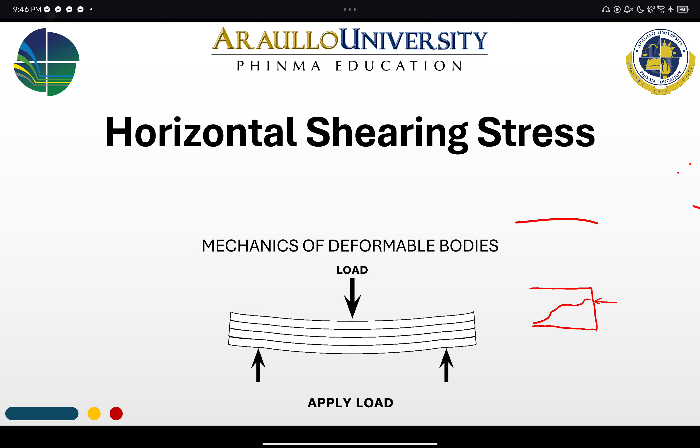So the horizontal shearing stress in the beam, tau, is given by the equation VQ over IB, where V is the shear force acting on the element, Q is the static moment of area, I is the moment of inertia of the beam, and B is the width being considered.

So basically, kung yung cross section natin ay, let's say, square, at gusto nating i-analyze kung mabibiyak dito yung ating beam, mahihiwa at a certain distance from a neutral axis, yung tinatawag nating B is yung lapad ng magiging crack, kung saan magkakaroon ng separation yung ating upper portion and lower portion ng beam.

Yung ating Q naman, static moment of area, that is the area nung matatanggal. Area nito, let's call it area prime. Moment, taking moment of this to the neutral axis, so meron distance na to na y bar. So yan si static moment of area.

Itong area na to, pwedeng area above, pwede rin naman yung area dito sa ilalim, kung ano yung mas madali. Pero dapat pareho lang yung makukuha nating sagot. Kung magkaiba yung nakuha mong sagot, ibig sabihin may mali ka sa pag-analyze. Dapat pareho sila, kahit above or below nung ating crack.

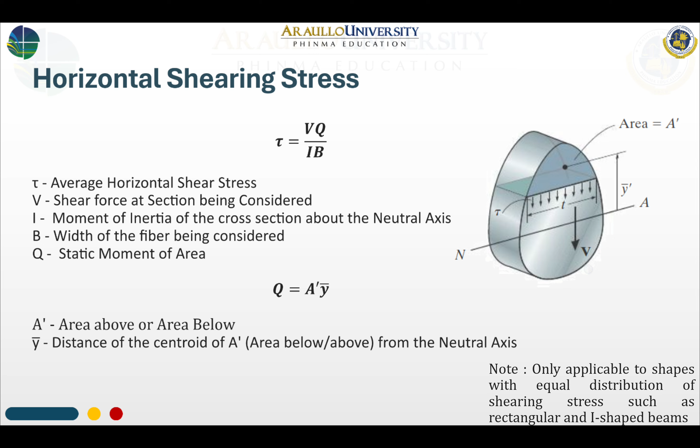So the application of the horizontal shearing stress, one of which is the spacing of rivets and bolts in built-up beams, or basically spacing ng fasteners. Iba naman yung nangyayari sa spacing of fasteners.

Kanina kung yung solid section ay nahahati, dito naman ang kino-consider natin na masisira or hihiwalay sa section natin ay yung nandun sa fastener, yung failure o pagbiyak ng ating section ay mangyayari doon sa pwesto ng fastener. So kapag nag-bend ito, ang tendency yung fastener, yung ating member sa taas o yung section sa taas ay hihiwalay.

So may tendency na pagka nag-bend, kung yan ay letter T, pwedeng itong letter T na to, yung ating tinatawag na flange, this is your flange, and this is our web. Pwede ang mangyari, at a certain point, yung web natin humiwalay, magkaroon ng gap dito kasi mabubunot yung mga fasteners.

So ang normal na tanong sa mga ganitong problem is, ano yung magiging spacing ng fasteners, E? Okay, and that is equal to R, the resistance or the maximum capacity of our rivets in terms of Newton or pounds, multiplied by the moment of inertia of the whole section, divided by the shear force multiplied by Q, the static moment of area.

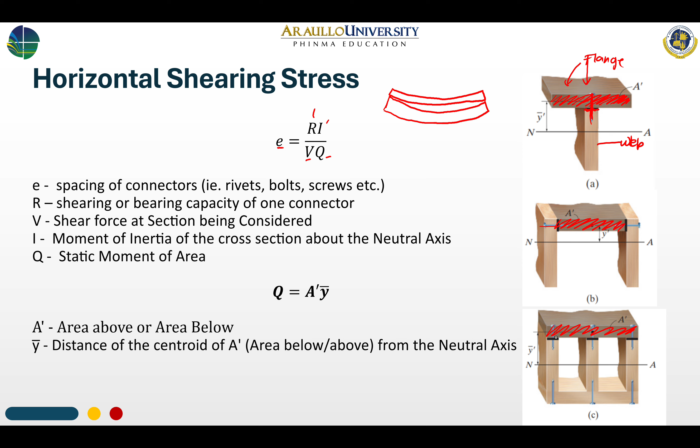And take note, yung static moment of area, similar doon sa kanina nating discussion, ito yung area na matatanggal. So in this case, pwedeng yung area na to, in this case, pwede naman yung area na to. Take note, dito isa lang ang ating fastener, dito dalawa, dito naman tatlo. We should consider the fasteners.

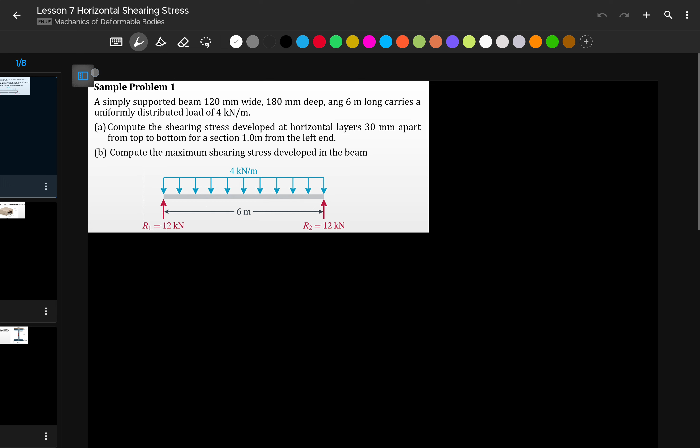So for this problem, number 1: a simply supported beam 120 mm wide, 180 mm deep, and 6 meter long carries a uniformly distributed load of 4 kN per meter.

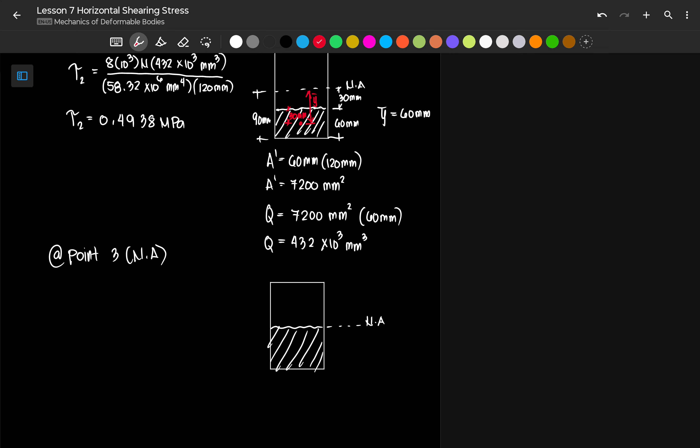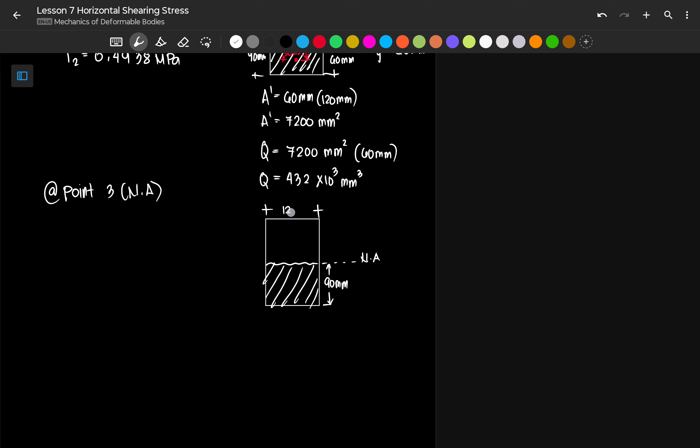So our area prime here, since we're at the neutral axis, half of it, this is 90 millimeter. This is 120 millimeter, correct? So our area prime is 120 by 90, which will give us 10,800 square millimeter. Then let's go to our centroid.

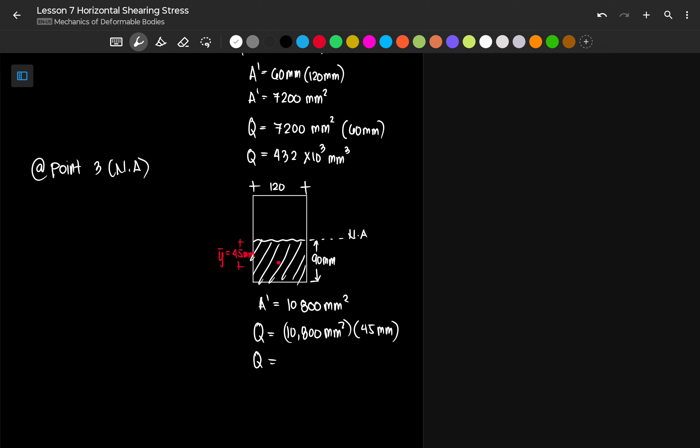It is located at the center, which is half of 90. So our y bar is 45 millimeter. So in this case, our Q is 10,800 millimeter squared times 45 millimeter. So our Q is 486 times 10 to the 3 millimeter cube.

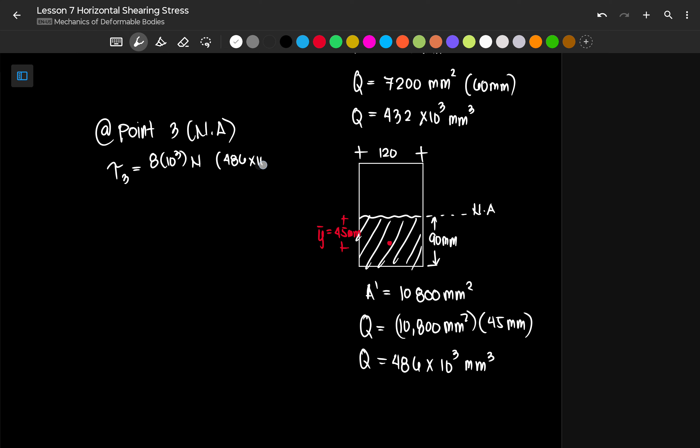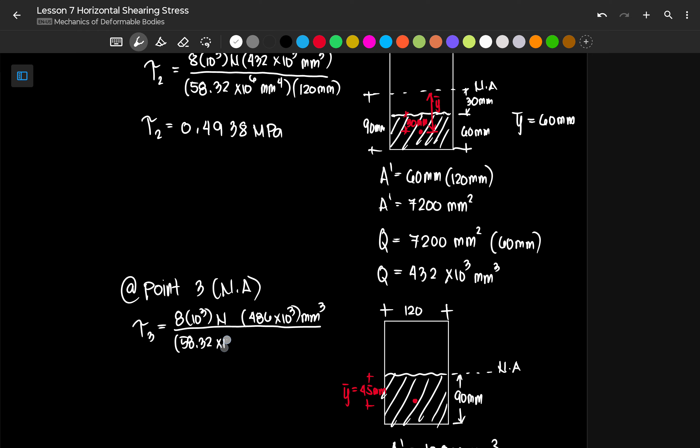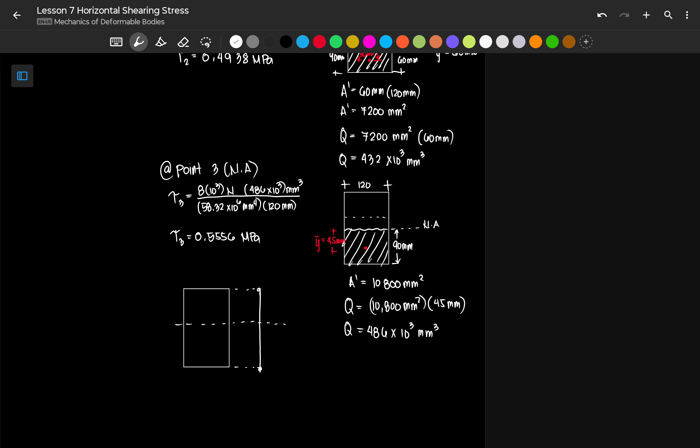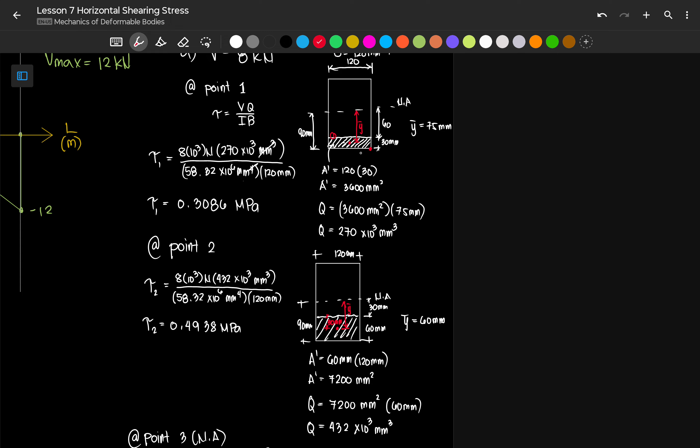So what happened here is we actually missed one point, the end, the very bottom. Let's say you analyze there, what would be the static moment of area? Since there's no area below that, the static moment of area there is 0. Therefore, when we talk about shear stress, the shear stress at the extreme fiber is 0, and the shear stress at the center or at the neutral axis is maximum.

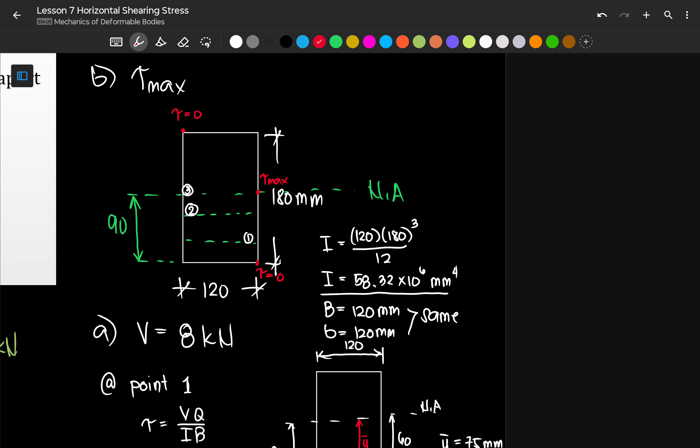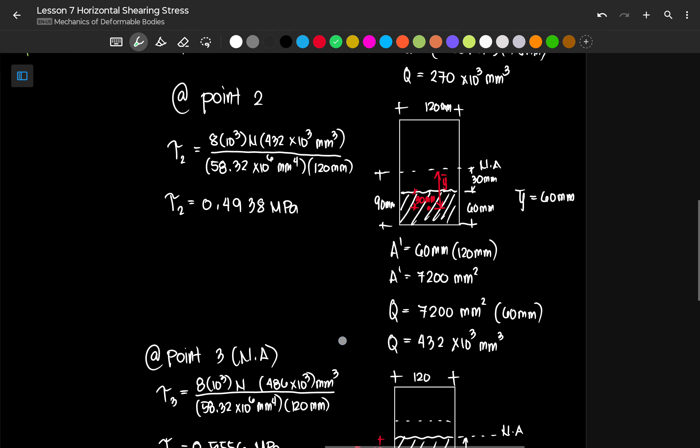So here we have 0 at the end. At the neutral axis, we have 0.55. So around there. And then we have 0.49, so they're almost touching. And then we have 0.308, so there's a big gap.

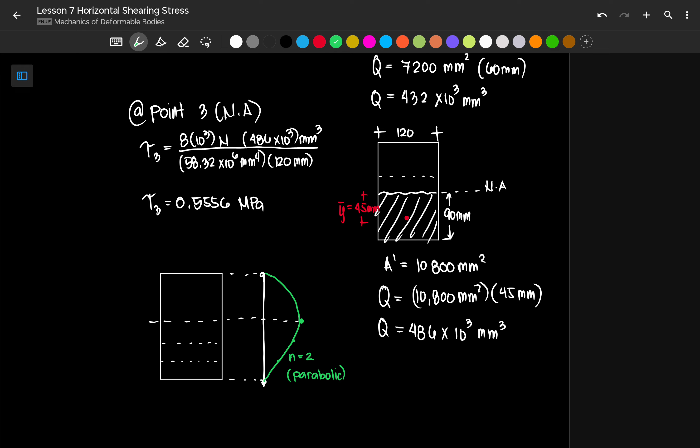So the graph looks like this. And actually that's correct, because the graph of a horizontal shearing stress, or the distribution of horizontal shearing stress, follows a second degree curve - parabolic. Unlike flexure which is linear, this one is parabolic. So that solves the first problem.

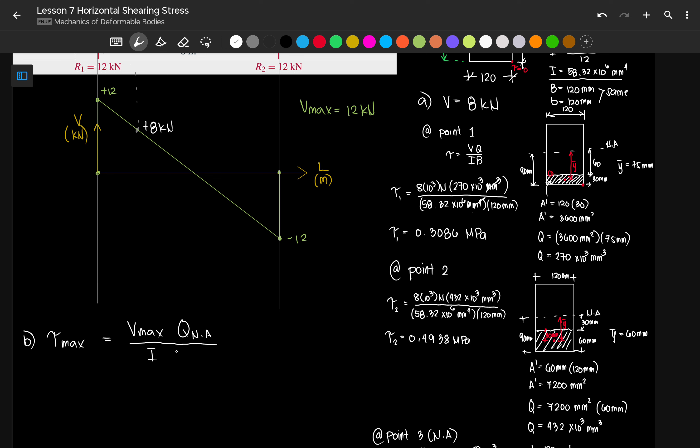Let's move to the maximum. So our tau max, letter B, that should be equal to the maximum shear force multiplied by the Q on the neutral axis, divided by I multiplied by B. So our maximum force is 12 kilonewton, so 12 times 10 to the 3 newton.

Our Q at the neutral axis, since the crack happens at the neutral axis, is this. So our Q is 486 times 10 to the 3 millimeter cube, all over our moment of inertia, which is 58.32 times 10 to the 6 millimeter to the fourth, and the width is 120 millimeter. So our tau max, or the maximum shear stress for this problem, is...

Just replace the shear with 12, since it's already encoded for all of this. Alright, so the maximum stress is 0.8333 megapascal. And that's it for this problem.